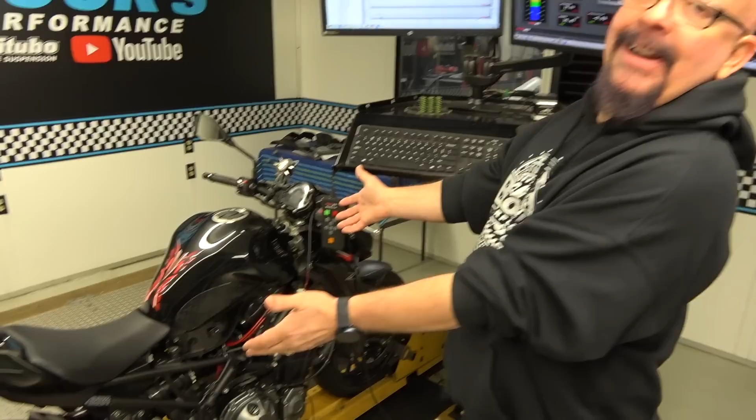But first, what is this? This is our buddy Josh's 2017 Z900 ABS Kawasaki. We've had requests to do items for this bike for quite a while, and we just haven't had time.

And one of the things that's been going on here lately, and nobody wants to hear about it. I don't, you don't, nobody wants to hear the C word. But COVID delays have basically got 3 other projects stalled. So we got with Josh and said, hey Josh, you mind bringing your bike over? We think we can slide in a test and some product development and some tuning real quick.

And he did. So this video is going to be pretty much in reverse of all the rest of our videos, because this bike is basically finished. What we're going to do now though is go through and explain to you exactly what we did and how we got to this point and the kind of gains that we did get, or maybe that we didn't get along the way. So buckle up. There's going to be a lot of talking at first, but that's okay. We will get to the meat of it right after this.

When we first met our buddy Josh, it was back in 2018, Sprint Filter had just made a filter for the Z900, and they wanted us to check fitment. We've seen some problems between Euro fitments and US fitments in the past, so Josh was kind enough to come by. His bike was completely 100% bone stock, 220 miles on it, and he graciously allowed us to install the only filter of its kind in existence.

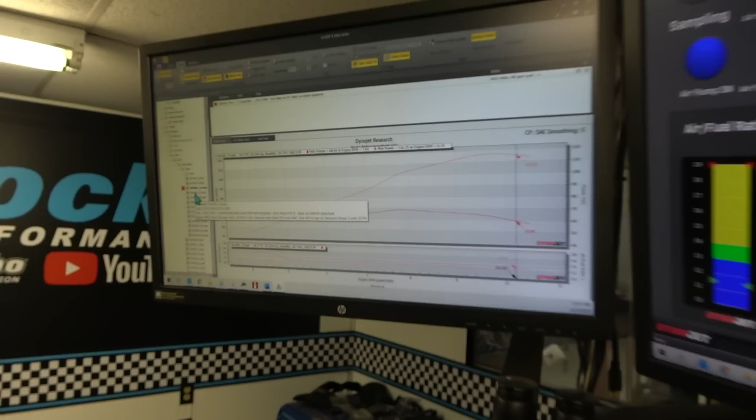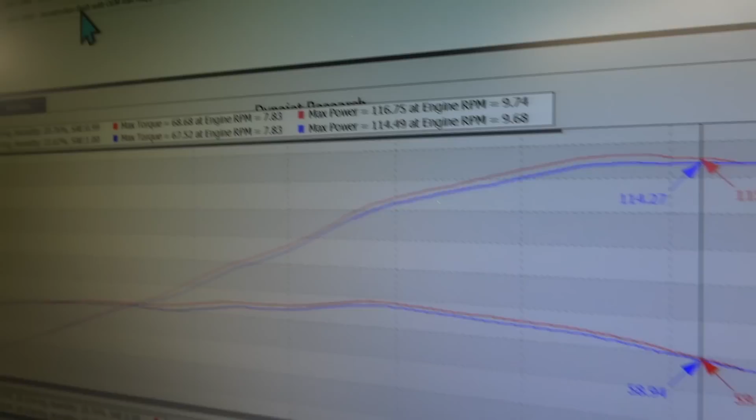So the first thing we do, the bike came back, we installed a Power Commander on it, that's all, but we put all zeros in the map, so it was like the Power Commander wasn't there. We went and we made a base run, and you see nice and clean. We've got our air fuel ratio here. So the first thing we did was de-restrict the ECU. I know this is a little difficult to understand or imagine, but the blue line is the de-restricted ECU.

It took us about an hour to do that, to get the ECU out, and you can see that we actually lost horsepower. Now we picked up another 500 RPMs in the over rev, but just a straight up install within an hour of a de-restricted flash with no fuel tuning or anything like that, with the stock exhaust, we actually lost power.

So I have people ask all the time, can I use a de-restricted flash in my ECU with a completely stock bike? Well, you can, yeah. That shows you what you get. You're not going to pick up any power. So what next? What would you do next? Well, logic would say, why don't you try and tune the Power Commander since you've got one on there?

Well, we're not in the tune a stock exhaust world, and we're in the wow, it's really busy here world.

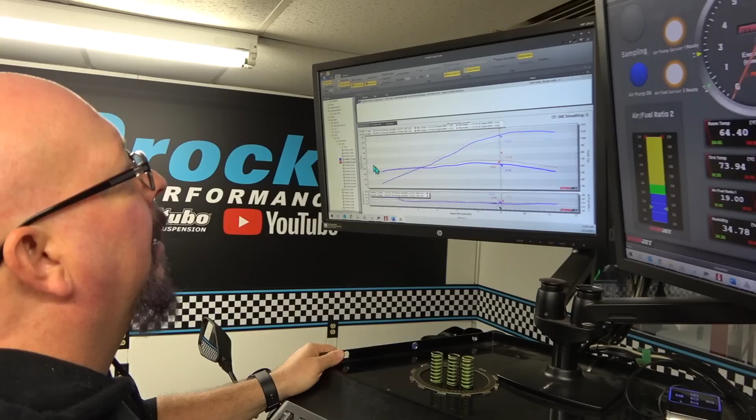So let me go in here. I'll get rid of this and no other changes. Just throw on our stainless Penta-Carbon full system. As soon as we throw it on, what do you get? Bam! Look at all of the power gains. That's with no tune. That's just putting on the exhaust. So is a pipe really worth that much? I mean, that's huge. We're looking at 111. That's a 14 horsepower gain up in the over rev. Well, yeah, it is worth that. And let me show you why.

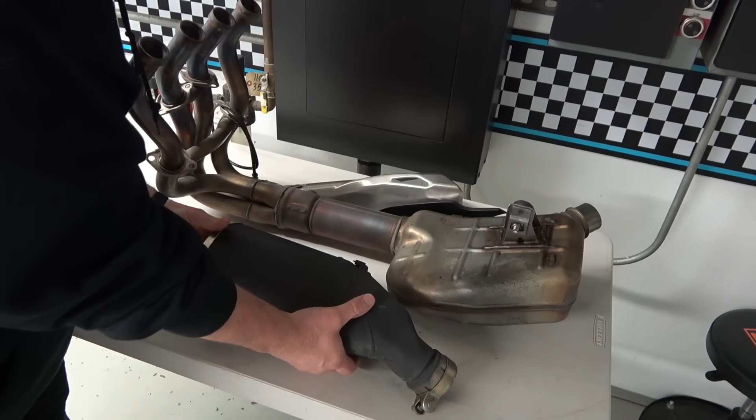Okay, here is the stock exhaust for the Z900. Everybody knows stock exhausts are really, really heavy. This one is about 28 pounds versus our Penta-Carbon, which is about 8.5 pounds. So you save close to 20 pounds, and I think the exact number is a 69% weight savings or something like that. But look at the way these are constructed. They're a little different construction. They've got the cat in there. They've got all kinds of stuff. But I want you to look right here. Look at these head pipes.

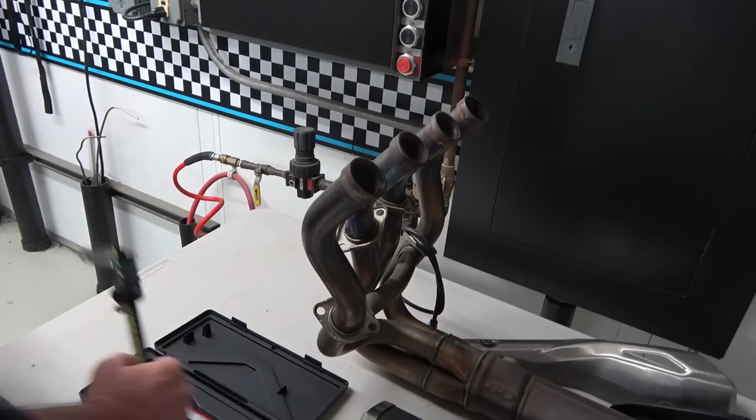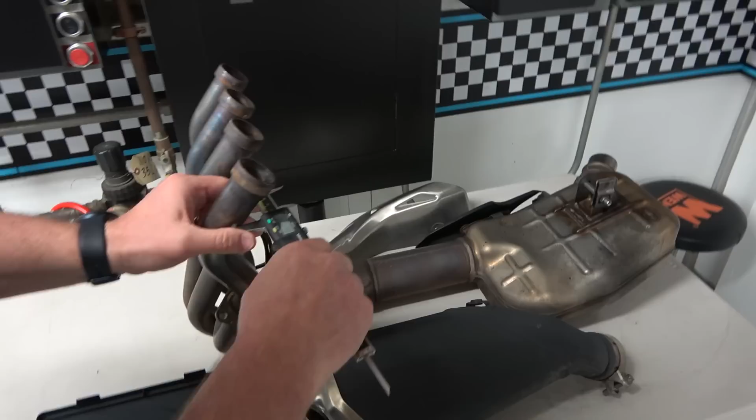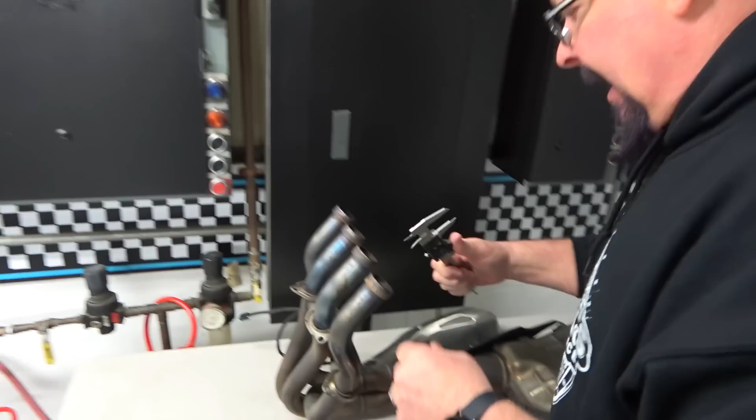Now, when we did the Z1000 back in the day, as soon as I saw this setup, I went, wow, I'm pretty sure my 600 had bigger head pipes. So let me look here, and I work in inches as opposed to millimeters. 1.37, go to millimeters, so it's about 35 millimeter diameter OD. But this is real thick, heavy walled tubing. So if I go in here and I measure the ID, now we're at 32.6, which translates out to 1.28 on the ID.

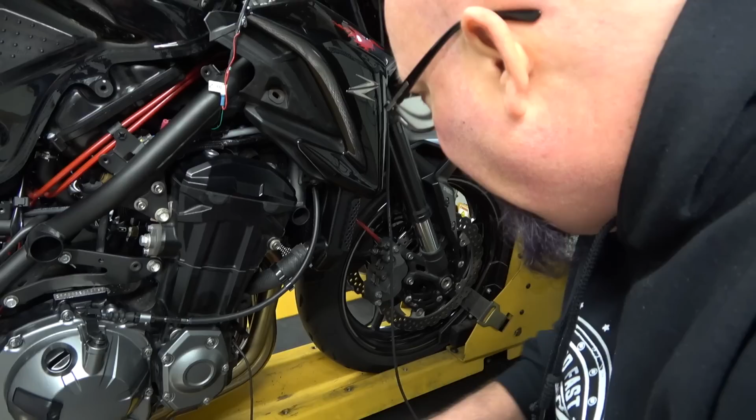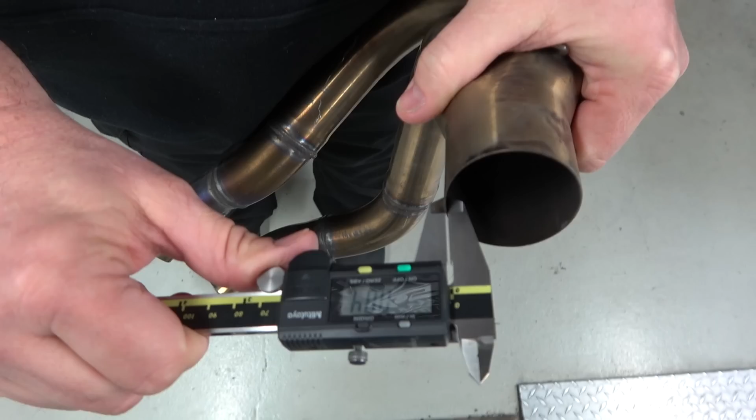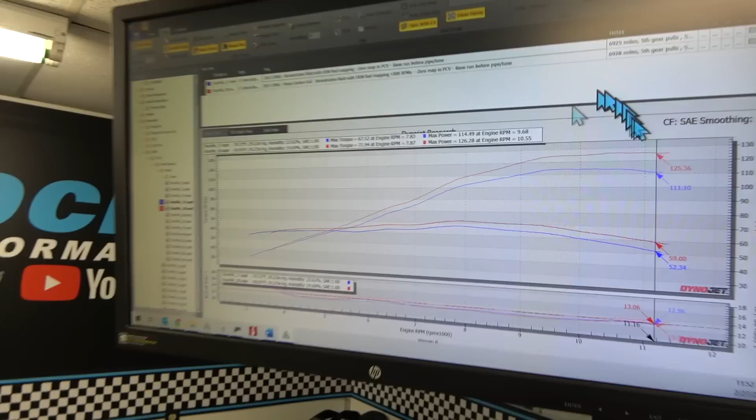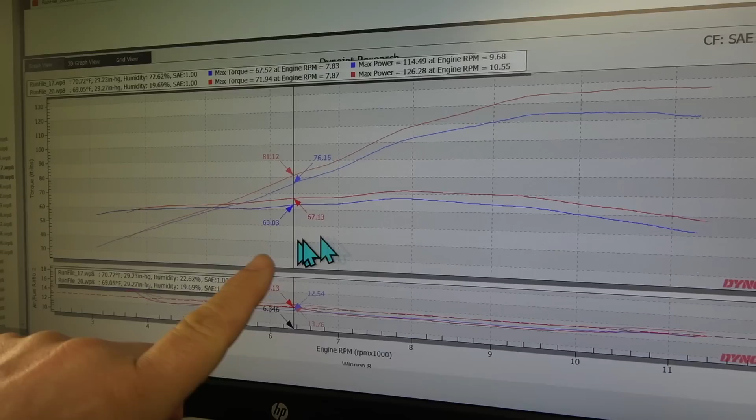Oh, Brock, I'll lose torque, blah, blah, blah. Well, you already saw the weight savings. And on this dyno chart, where we did have the derestricted flash already in, we already had the sprint filter, you can see, look at this gap in power from 4,000 RPM up. We have picked up horsepower and torque all the way up everywhere. So where's the disadvantage to this? There isn't one. There really isn't.

The OEMs have their hands tied, and they have to figure out ways to restrict these bikes for noise and for emissions. Now, typically, we talk about, well, fix it in the flash. Well, we put a flash in there, didn't do anything. What we're looking at is a restriction. Typical restrictions are either electronic or on the intake side of the motor. This is a restriction on the exhaust side of the motor. It's not what we're usually doing. Like I said, we're working backwards here in more ways than one.

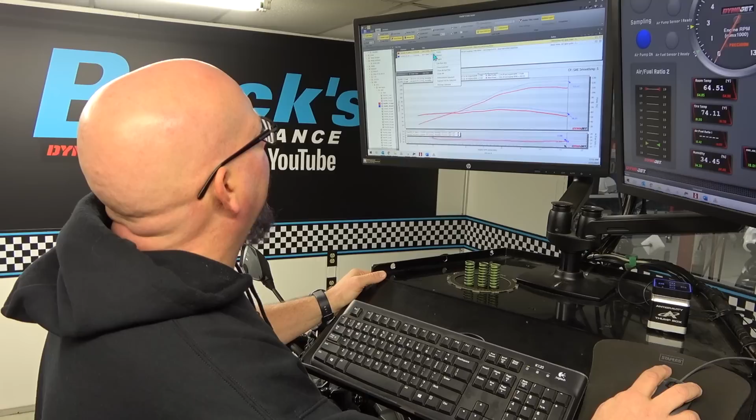So once we remove this restriction, now we've got a high flow system, so our high flow filter should work out, and our ECU flash, because we're also adding additional RPM. So let me show you some of those results right now. All right, so we're gonna go ahead and get this run out of the way because it doesn't matter anymore. Now we've got our Penta-Carbon full exhaust installed.

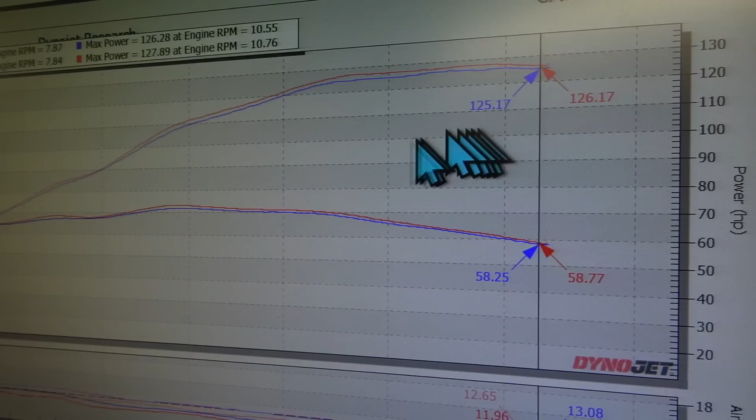And so what would we do next? Well, we've got a Power Commander, so let's go in there and do some tuning. Because it's derestricted, we can tune all throttle openings and get the bike really, really smooth. And also, we typically pick up a little additional power when we tune that way. So let's pull that up, and you can see with the Penta-Carbon and the street map out of our Map Support program with our de-restriction flash, we got a nice little gain, a couple horsepower everywhere.

Now, the one thing that a wide open throttle dyno run won't show you is how much smoother this bike is to operate now. Boy, it is just liquid smooth from an idle, low RPMs, all the way up to red line, really, really working well. So, okay. We're jamming. Brock's is experiencing crazy growth. What do we do next?

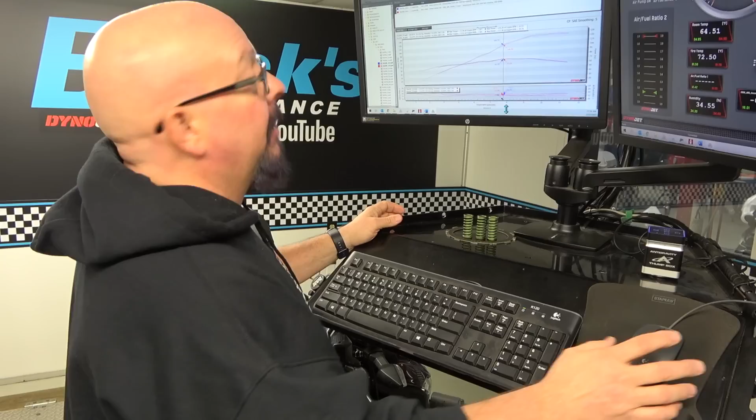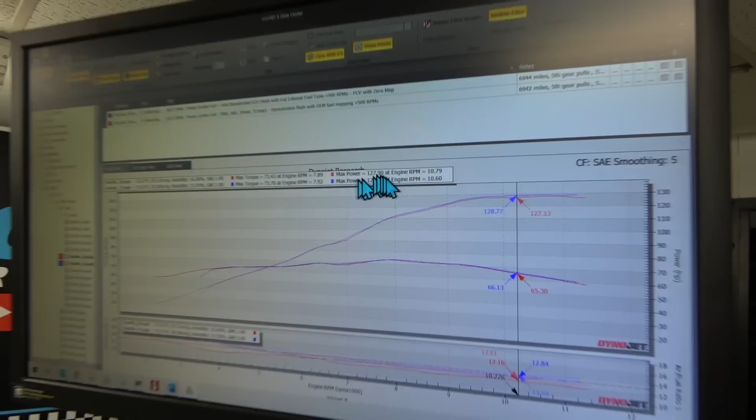Well, a lot of guys don't want a Power Commander or piggyback for some reason. It's a bad word in the industry. You can save some money. So what we did next, and I'll go ahead and pull this out of the way, is we created a fully tuned ECU flash. So you don't have to have a Power Commander. If you're a set and forget kind of guy, you can buy that tune from us. You get the de-restriction flash with the tune already in, no Power Commander needed. And you can see here, we actually picked up a little bit of power, not a lot, but that worked out well.

So, okay, what next? Well, a lot of our guys like going with oxygenated fuels. Now, unfortunately, it's wintertime. We didn't have any fresh MR12. I found some MR12 that was almost a year old, but it wasn't gummy and sticky, so we went ahead and threw that in. Once again, I'll get this out of the way. All right, so usually when we put MR12 in, it's good for 5, 6, 7 horsepower. Some bikes as much as 9. It just sort of depends on their compression ratio.

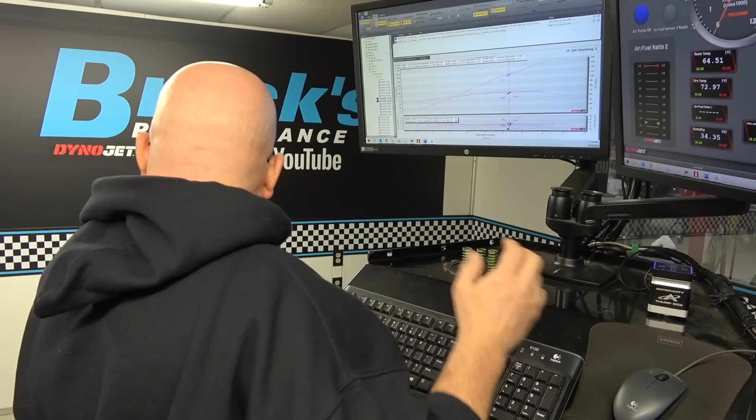Well, if you look and see what we've got here, we got a nice little gap here. There's 5 horsepower. But what the heck is this? We're picking up power, and then all of a sudden that goes on. Well, let me explain that to you. So what do we have right now? We've got a Penta-Carbon, de-restricted flash, MR12. So in my notes up here, I have put in the title, audible clutch slip. As I was making the run after we added the MR12, I actually heard the clutch slip, and then it just sort of caught again. I thought, uh-oh, we have reached the capabilities of the stock clutch.

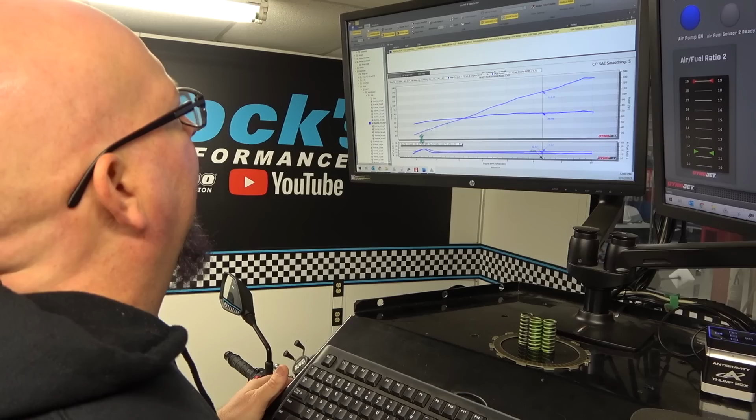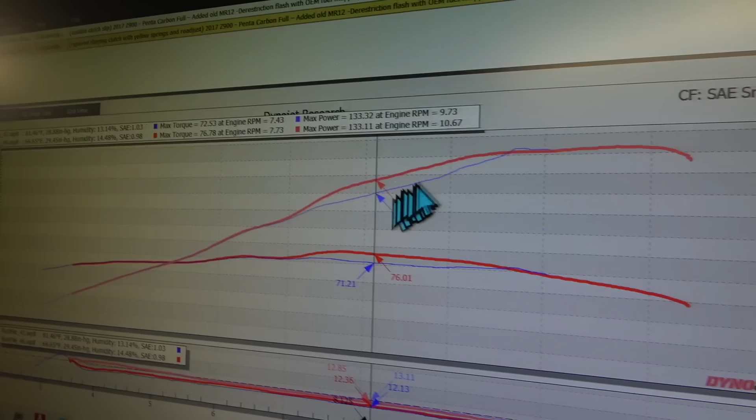So we stopped what we were doing, and we pulled the clutch, and we had one plate that was showing signs of slippage, but the rest of the plates, and even the back of this plate, looks almost new. But you can see the pads are smeared here. This was definitely slipping. So we took our yellow clutch springs and put those in, and then made another run. Once again, let me get this out of the way. And look what happens when we fixed the clutch slip. Oh, bam! Look at that. That's our power coming right back. Looking good.

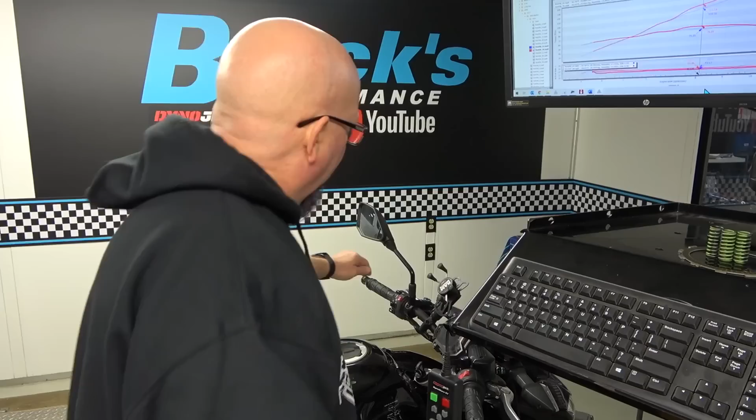So we got that fixed. One thing I do want to mention also, guys, is as we were increasing the power on this bike, and I had made a couple other runs too, I could hear it slip. I knew it was slipping. One of the things you have to watch is as you increase the power on these bikes, not only do you need to beef up the clutch, of course, because it's making quite a bit more power,

you have to watch because there's no secondary adjustment on this clutch like you would have on a GSXR or a BMW. So the free play up at the lever is really, really critical. Make sure you have free play at your lever, because if you lose free play at the lever, you're going to get clutch slip also. So we may have had a little bit of that going on. I'm not really sure, but either way, we've got it fixed.

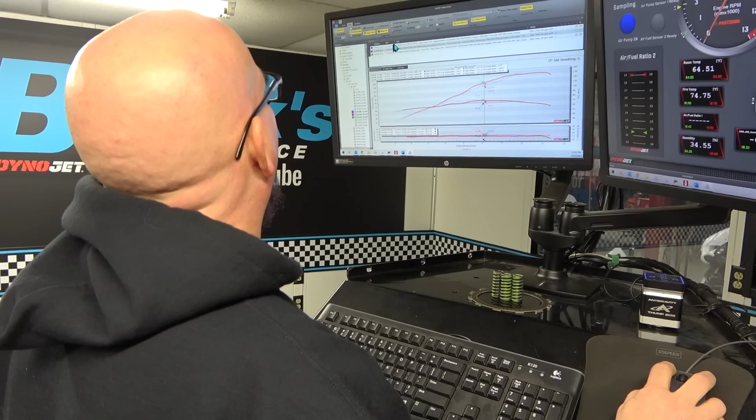So what now? COVID. We got to get shit done, get it done. If you've been waiting for a stainless exhaust, hopefully yours is on this. Knocking some of the COVID delays out of here.

Well, somebody said, I saw Chris Moore's video and he changed the ignition timing and got miracle results. Okay, well, let's check that out. Once again, I'm going to move this out of the way, but you can see that was our run. This is our run where we added 2 degrees ignition timing up top. And what the heck? We lost power pretty much everywhere.

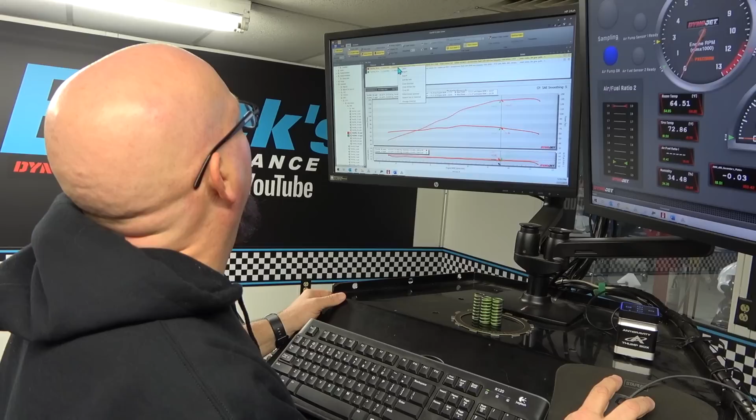Now, I can go into a tirade about ignition timing, but if you know my thoughts on it, very, very rarely do we pick up power with ignition timing. About the only time we do is sometimes you can put in a higher octane, 93 octane, and bump the timing up so you can burn all that extra octane and you can see a power gain. 9 times out of 10, we just don't mess with that. I like the stock timing.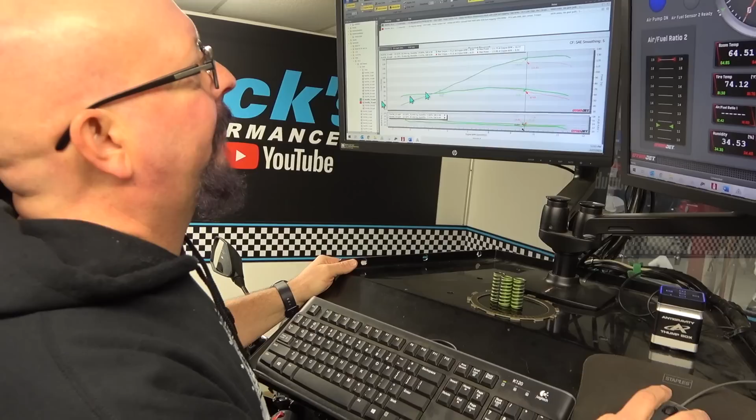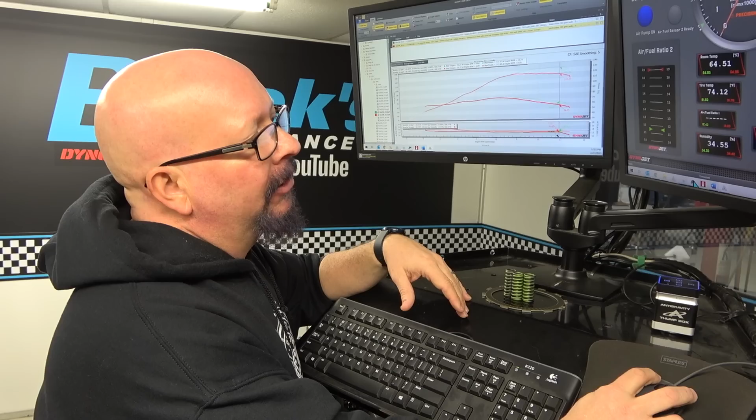Brock, why do you use 89? Because they don't make 90. The bike is supposed to have 90 in it. That's what it calls for. And we know from previous testing and countless videos and countless articles that 9 bikes out of 10 will make more power on 89 octane than they will on 93. We've got the 89 in there. So for a base run, we go in.

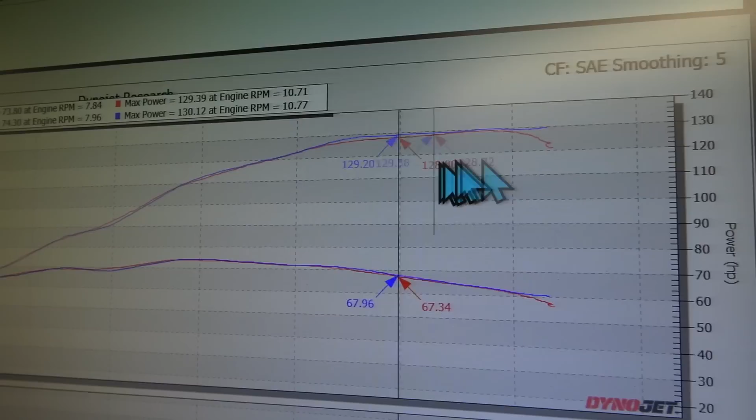I'm just going to close all this stuff out and pull this up. So that's where I started with the 89. I got my 34 degrees ignition timing. Was that any good? How would I tell? Well, let's just go put the stock ignition timing back in with the same mapping and everything. What do we got? Check it out.

That's the blue line. The blue line, we managed to pick up a little bit of power pretty much everywhere up top. Not really much down here, but moral of the story, if I've got 34 degrees ignition timing in my bike, I don't pick up any more horsepower, but if I get a load of bad gas, I could detonate, destroy my engine. So put the stock timing back in.

So where are we now? Well, we are in a very interesting position. Got the bike all done, but what's up with that Sprint filter horsepower stuff at the beginning? So what I'm going to do, I'm going to work in reverse. The Sprint filter is in the bike right now. We've got it all tuned up.

I'm going to make 3 dyno runs right now to get us base runs, and then as quickly as I can... our buddy Josh knew he didn't need his stock filter anymore, so he threw it away. So I went and bought a new one. That's always fun. Love buying new filters that I don't need. But I'm going to put in a brand new filter and see just exactly what kind of gains or losses we're going to get by putting the stock filter in versus the Sprint filter. So let me go make these warm-up passes and the base runs, and I'll be right back.

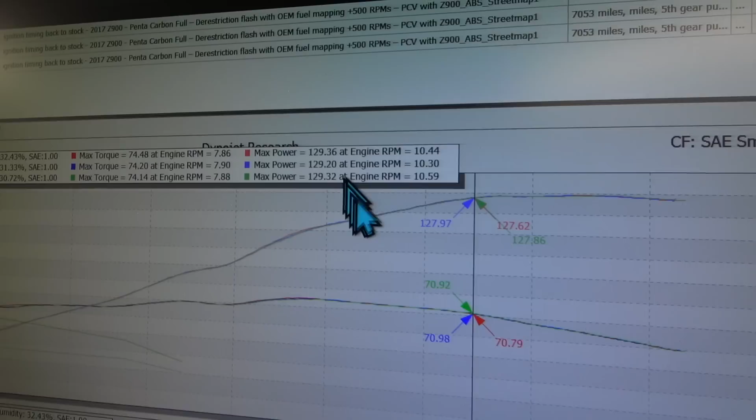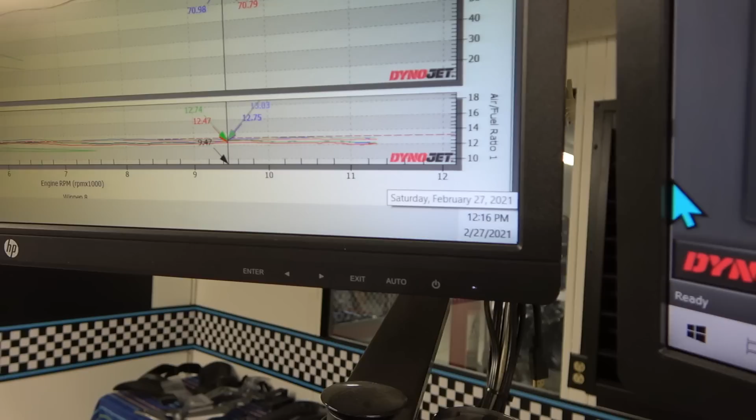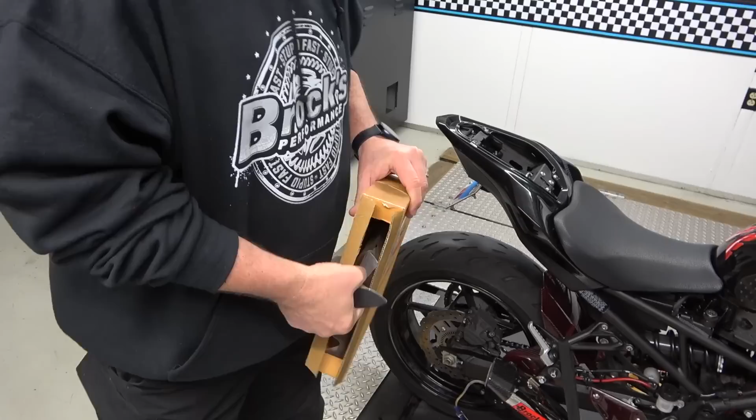Okay, man, I love bikes that are just brutally consistent. Look at this thing. This is a dead ass overlay. 129.36, 0.20, 0.32. You don't get any closer than that. Now, look, it is 12:16 p.m. This bike's already partially disassembled, which is going to make changing the filter a little bit easier. Let's change the filter, not change anything else, come back in, and see what happens removing a high flow Sprint filter and replacing it with an OEM paper filter. Let's show you what we're looking at here.

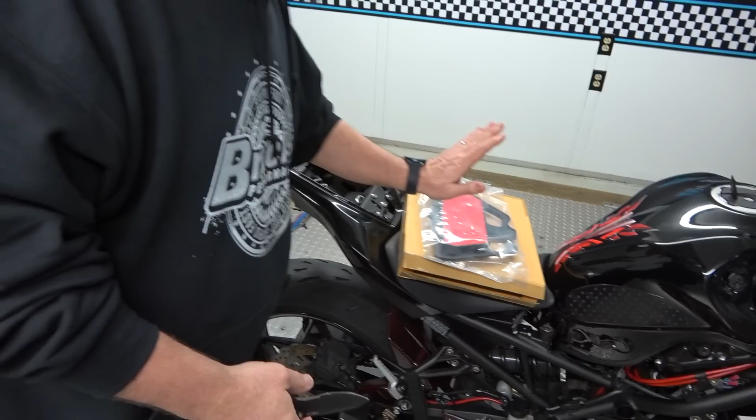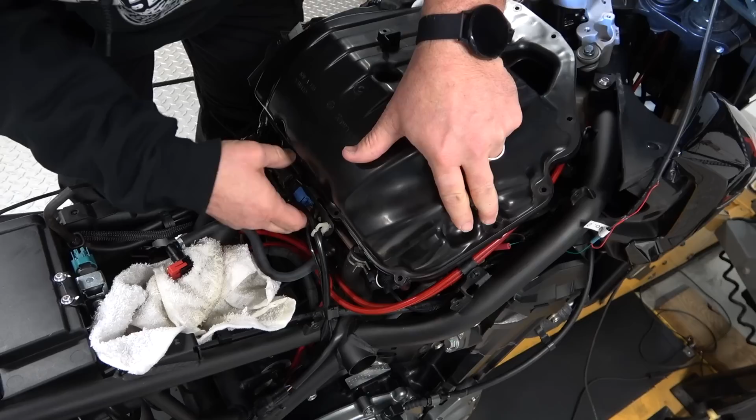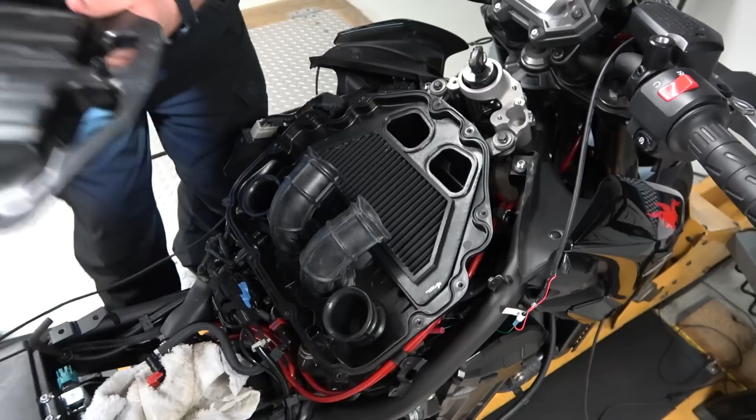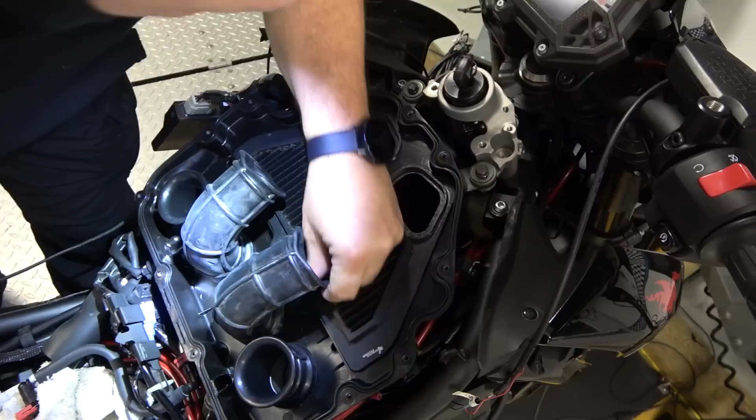All right, OEM filter, just the way it would be replaced if you took your bike to your dealer. We're going to put that in and see what happens. Stay tuned. Man, they put enough screws in here. You'd think it's airtight. I cracked myself up. Got a little wire holder. Pull that out of the way. You can see a couple slots. This just slips in the slots. Pull this up. Now, there's our bolt.

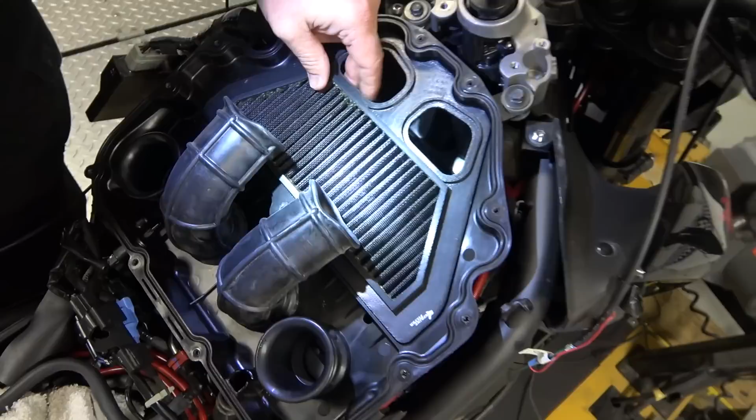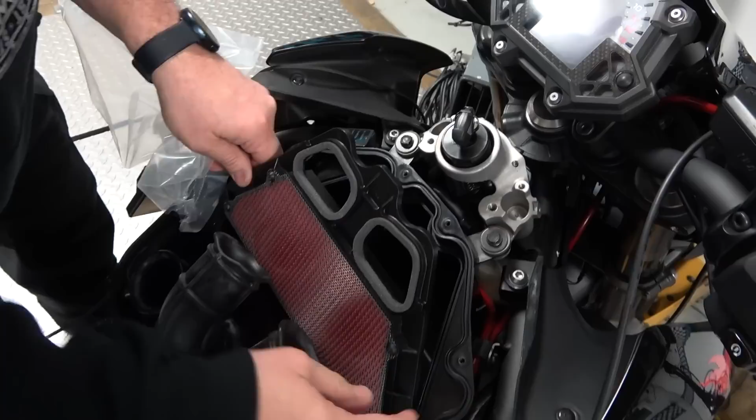All right. So, I don't know when the last time this airbox was cleaned was, but it looks awfully good. I mean, anybody who thinks that there's not going to be anything in their airbox is fooling themselves. That's not how this works. There are particles small enough. You can see it's a little bit of superfine dust in there. That's completely normal. Like I said, this was the original Sprint filter. It was basically just sort of glued in there. That probably wasn't helping things either. But we'll put a production filter in. Looking pretty good over here. That fell off when we pulled the tank. So let's go ahead and put the stock filter in, see what we get.

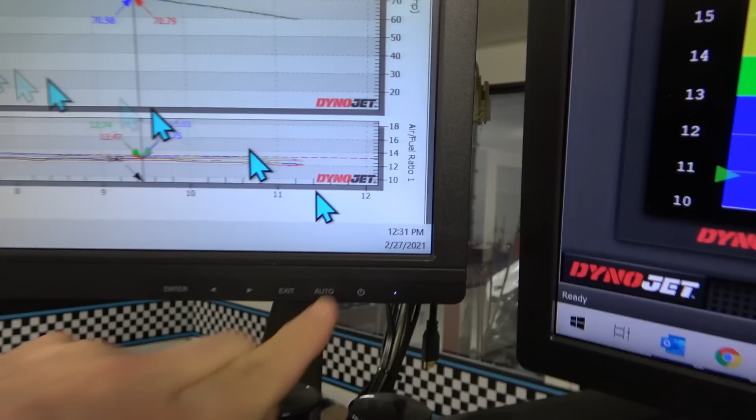You know, you could change velocity stacks on this bike and move the power, more peak power if you wanted to, you know, sort of make it more racy. It looks to me like you could just buy a number 1 and 4 stack and put it in number 2 and 3 position, and that would help the peak power quite a bit. Unfortunately, that really will hurt torque down low because stacks only move power. They don't make power. We are ready to go back together. Time, 12:31.

All right, so what we're gonna do, we're gonna make 3 base runs again. Now remember, same mapping, same everything. The only thing we changed was going from the Sprint P08 F1-85 prototype air cleaner back to stock because we didn't have the ability to tune when we did it the first time. So like I said, this video is a little backwards from normal, but let's see what happens. My guess is that we're going to lose horsepower. Big question is how much?

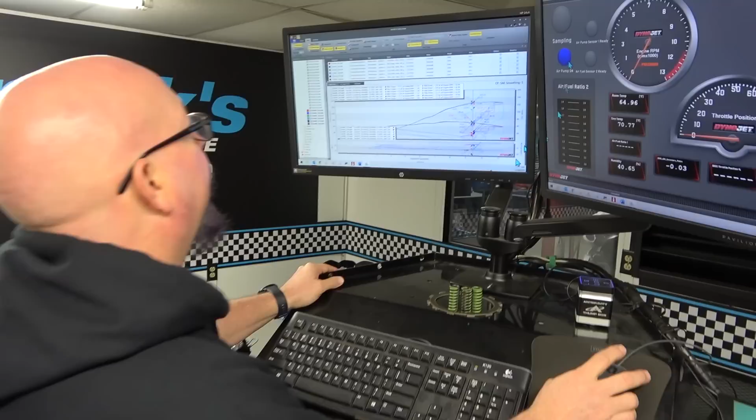Guys, well, full disclosure, this is the next day. Right after we made our runs with the stock filter, I had an appointment. We were running late, so we just decided to leave everything up, come in the next day, and discuss what we just saw.

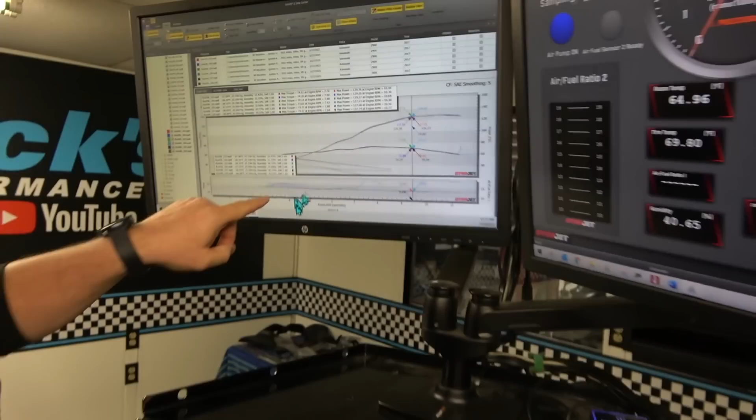Now, if you were paying attention to the 3 initial base runs with the Sprint filter, we put the OEM filter in here. If you look at the peak, we can definitely see some losses, which is what we'd expect. Now, if you're looking over here, you're probably going, oh my God, what is that mess? It's a disaster. Well, we have a problem even with the filter turned on with what we call wraparound, and so I can even turn it on, but we still get it here. You can't see anything.

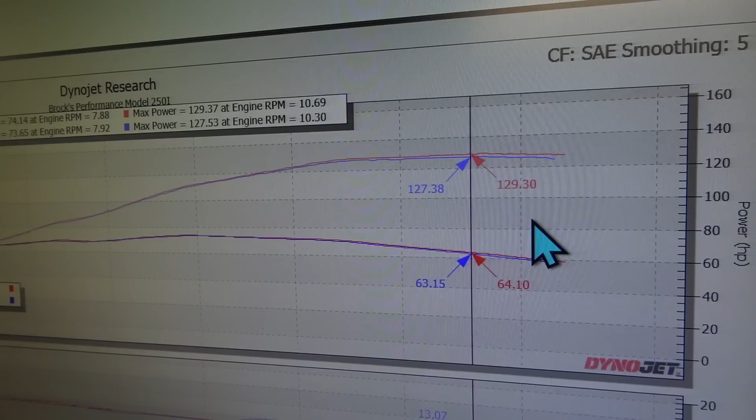So what I'm gonna do, I'll take the best run from the Sprint filter, best run from the stock filter, clean both of those up, and show you what's going on in a little bit more detail here. Just take me a minute. All right, we've got this cleaned up a little bit, and if you want to zoom in, you can see, we definitely see a sizable, measurable decrease in power. The higher RPM we go, 129 to 127 and some change.

Now, that's the kind of gain that we would expect when we put in a Sprint filter. Of course, like I said, backwards. We just showed it as a loss when we put the stock filter back in. But I want to point something out. Now, you'll see sometimes we'll put a Sprint filter in and we'll pick up 4, 5, 6, even more horsepower. Well, those are in higher power applications.

You got to remember, your engine's nothing but a pump. We're trying to get more air in, more air out. Like the GSXRs and the ZX10s, the high revving 14,000 RPM, moving all kinds of air, that's where you're really going to get your big gains. But even with something like this, we saw a measurable gain and we get the benefits of being able to clean it easily. So, where are we and what did we learn?

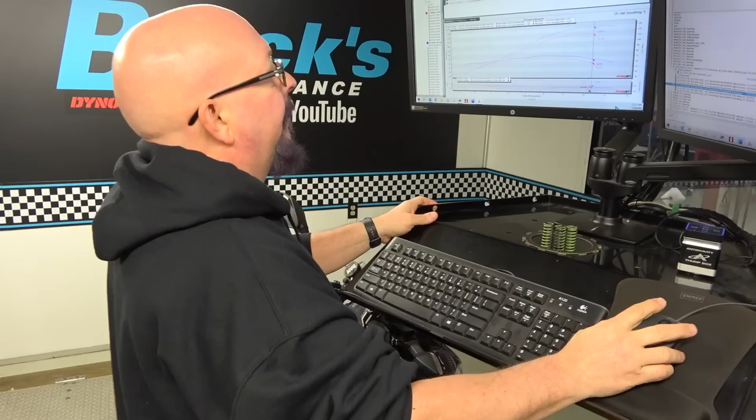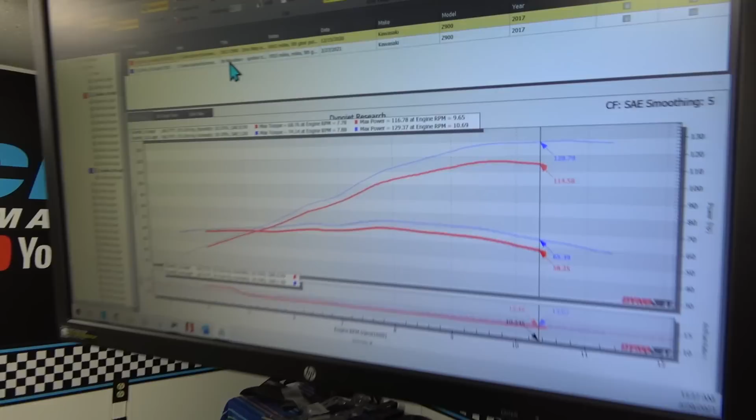Let me pull up where we started and compare it to where we are with the Sprint filter and give you an idea of exactly what happened as a result of the changes that we've made. All right, so where did we start versus where we are now? If you want to come over here, I'll highlight the red. The red is stock. It was basically 100% stock motorcycle, except we added the Sprint P08 F1-85 air cleaner.

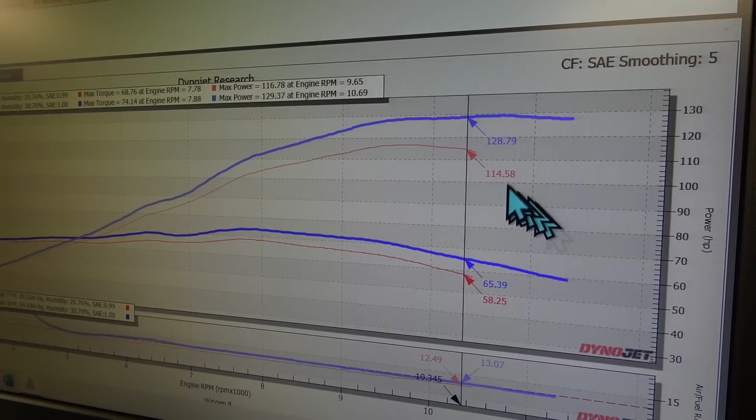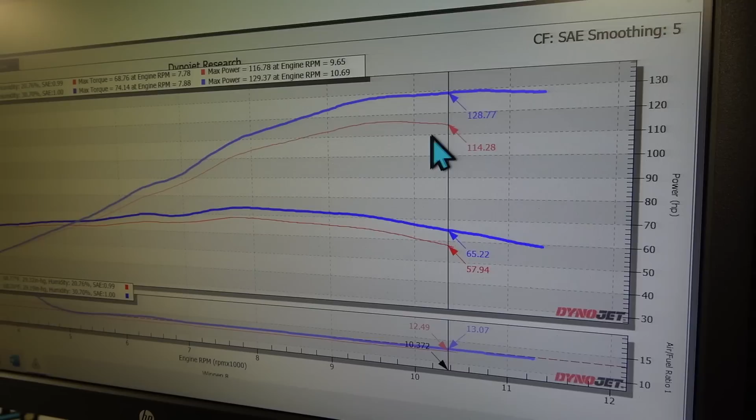The blue line is where we just finished up. Pump gas, the same Sprint filter, and you can see the gains. We've got some really, really nice gains here. 114 to 128. I want to point out this area up here. We call it over rev, and I know I talk about this every once in a while. I don't want people to start getting annoyed, but I'm really trying to get this point across. So the OEM rev limiter comes in at right about 10.4. I could go see exactly.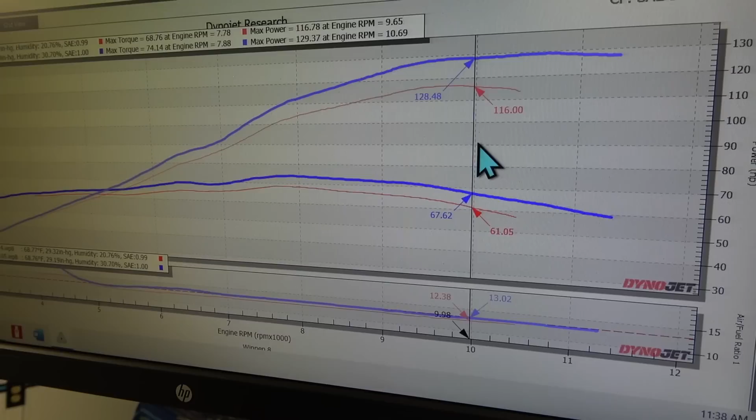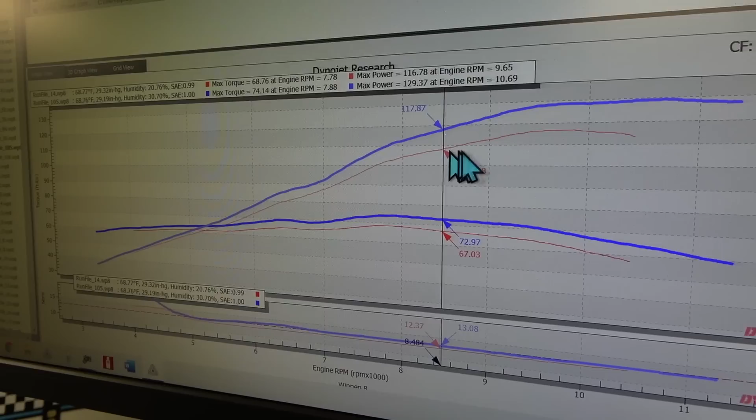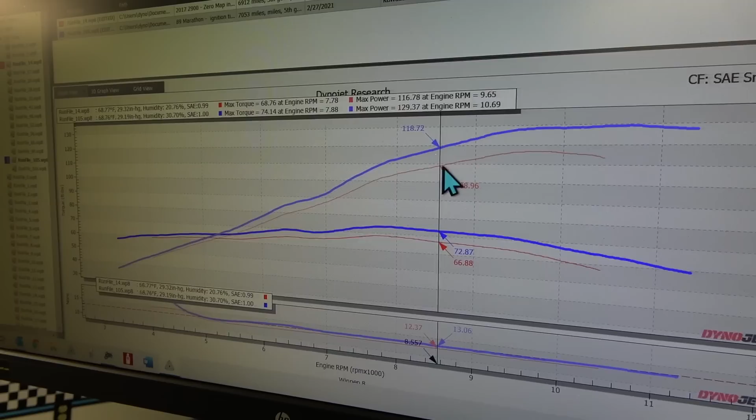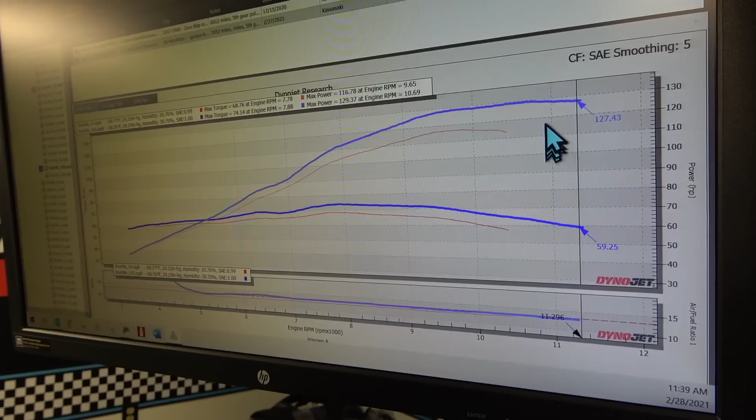So let's say you shift right before the limiter, well, you can see it starting to fall off. So let's shift at the point of maximum power, and we will assume that we're going to drop back about 1,500 RPM after our gear shift. Let's make it easy, let's just pick 10,000 RPM. I shift the bike at 10,000 RPM, first gear, second gear, it falls back about 1,500 RPM. So at 10,000, I had 116 horsepower. 1,500 RPM back, I begin accelerating again from 108 horsepower.

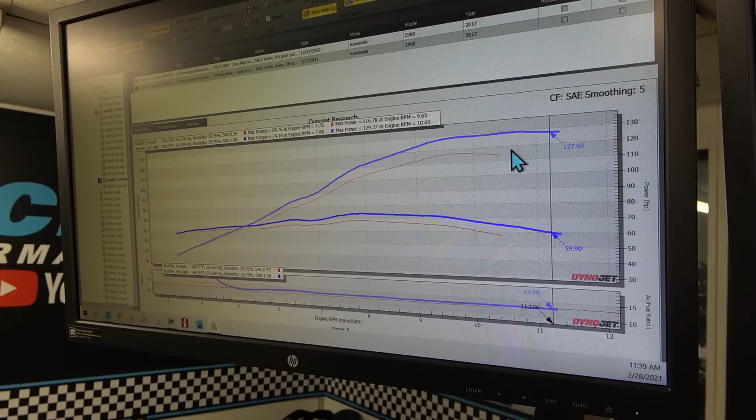Now let's look at it with our de-restriction flash, where we also added some additional RPM. So just to make it easy, let's say I'm here at 11. Well, I can get up closer to the rev limiter here. So let's just say I shift at 11.1, and we're making 127 horsepower. Well, we fall back 1,500 RPM, we're still at 128. Even further, we're still at 128.

So what that means is I can rev the bike. It's not nosing over like it did stock because we have the air cleaner, we have the pipe, we have the de-restriction flash. I shift at a higher RPM. I fall back into an area that has a whole bunch more horsepower to begin my next gear from. So that makes for a faster, quicker accelerating motorcycle.

So our buddy Josh, when he starts getting into the upper RPMs, he's gonna get a really big surprise, because these bikes are apples and oranges. Not only does this bike run much better now, but it's also considerably lighter. It sounds great and it looks cool.

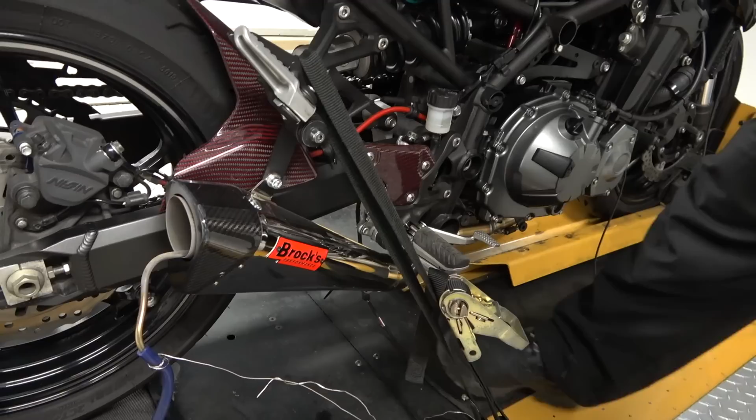I don't know if I want to get into this wormhole, but I get questions all the time about, Brock, what is the optimum air-fuel ratio for my bike? And people get mad because my answer is, it's the air-fuel ratio that your bike makes the most power at. There's no magic one. I can't spit out, well, it's 12.88664 to 1. No, it's crap. It's not the way it works. And I'm going to show you how I know.

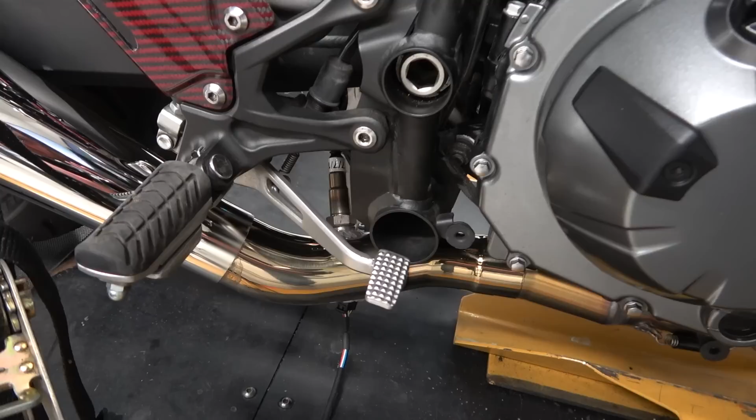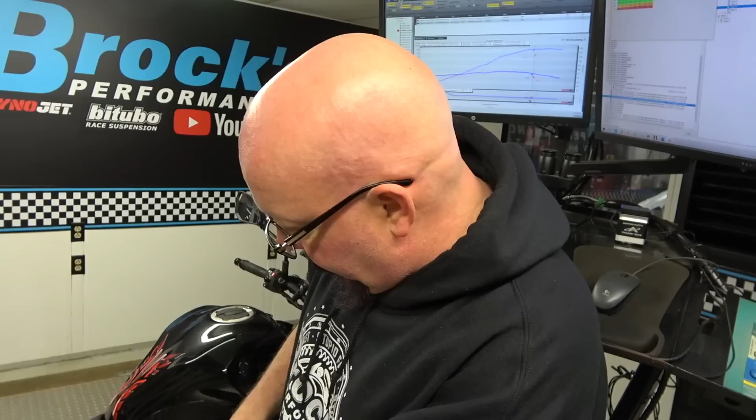So, most of you have seen what we call a sniffer that we put inside the exhaust system. Now, typically, sniffers are used for OEM applications where you don't have the option of putting in a second sensor. And I'm going to get on the other side and point here. So, we also have one here inside the pipe. Brock, why would you have two sensors in your exhaust? Oh my God, this is crazy town. Well, to me, you never can get enough data. So if one of these sensors goes bad, I still have the other one so I don't throw out all

my runs. But let me show you something that may confuse the hell out of some of you, and some of you might go, duh, that's what it is. Hold on, let me, 1 second. All right, bear with me here. In the words of Confucius, a man with one watch knows what time it is. A man with two watches has no idea. Ha! Kind of crazy babbles that, Brock.

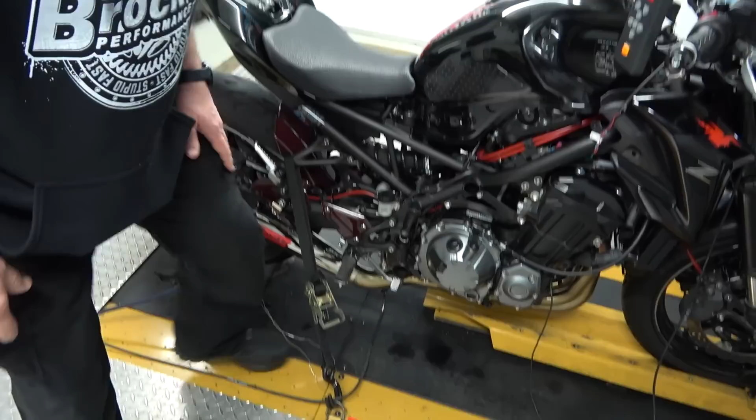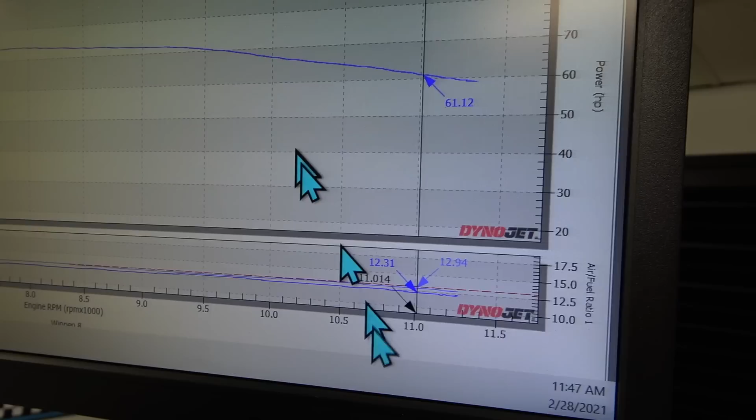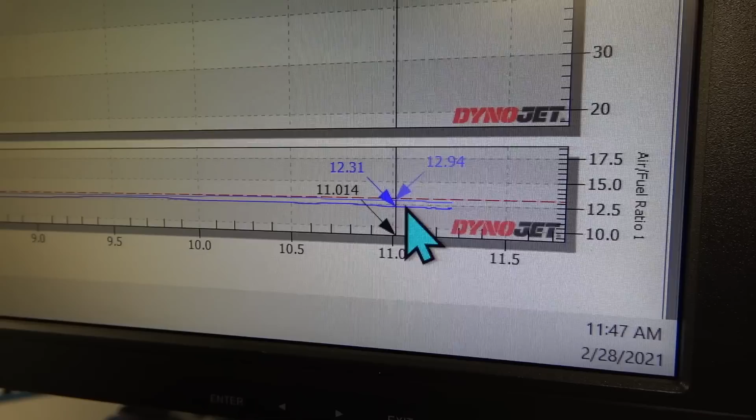Well, check this out. And once again, let me point this out. So, air-fuel ratio number 1 is being measured here through our pump. Air-fuel ratio number 2 is being measured directly inside the pipe. And I'd made mention in the past where typically this sensor will read a little bit leaner because it's more likely that the pump's going to draw air in also, whereas the one in your pipe really should be the one that's most accurate. So here we have one of our higher performing runs, and let me zoom in here a little bit.

All right, so at 11,000 RPM, air-fuel ratio number 1 is 12.94 to 1. Air-fuel ratio number 2 in the pipe is 12.31 to 1. Which one's right? Well, that's simple. They both are. All air-fuel ratios are a reference. So these two sensors aren't all brand new. One of them could have more time on it. We've got no way to check their calibration. So you've got the two sensors that may not necessarily read even, and then you have the fact that the pump can draw in more air.

So how do we know that's the ultimate air-fuel ratio for this bike on this day? Well, that's simple. We go in here and we make runs until we get maximum power. Okay, that's my best run. Then I add some additional fuel. If the horsepower goes down, then I know the other one was better. So I go in, I remove fuel. Well, if the horsepower goes down, then I know my original was better. And that's what this is.

That's better. So for this bike, with that filter, that flash, that pipe, that Tier 2 Marathon 89 octane pump gas, that is the ultimate air-fuel ratio when being measured on this dyno with our equipment. And that's all there is to it. I would have never been able to tell you previously, because usually, if you've seen our other series, we'll shoot 13.2, 13.5 to 1, depending on the bike. Well, here we are at 12.9 and 12.3, and it's the best. That's what it wants. It's what the bike wants. So anyway, I hope that didn't confuse you too much.